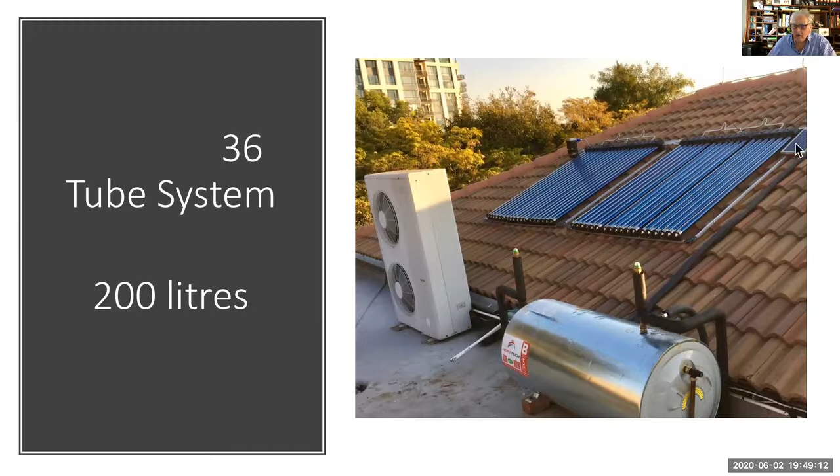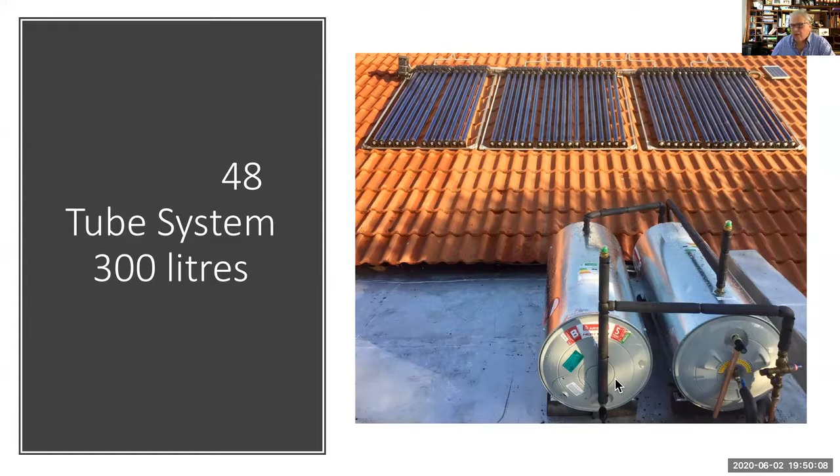So here's another example. This is actually a 48 tube system with a 300 liter system rather than 150 or 200. The tanks are joined together in series, exactly the same principle. The water is taken from the tank through the solar collectors and back again into the other tank, and they're joined together in series.

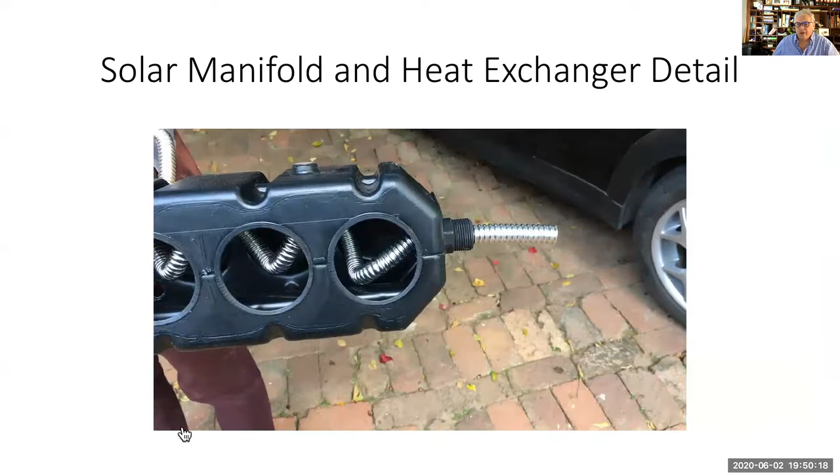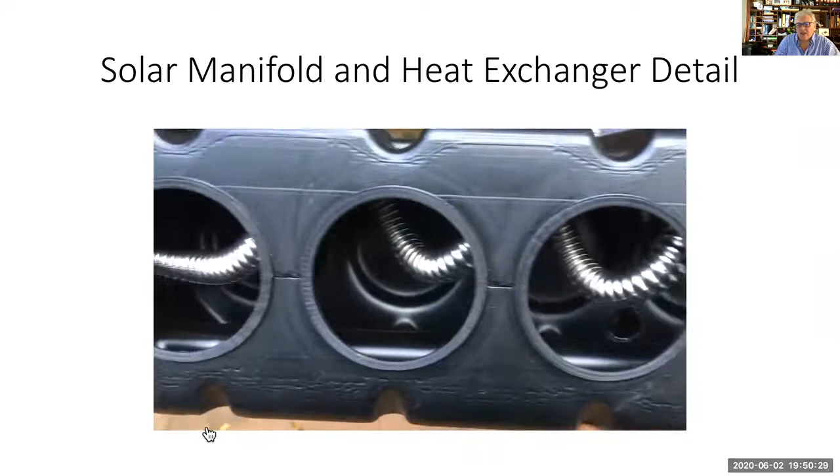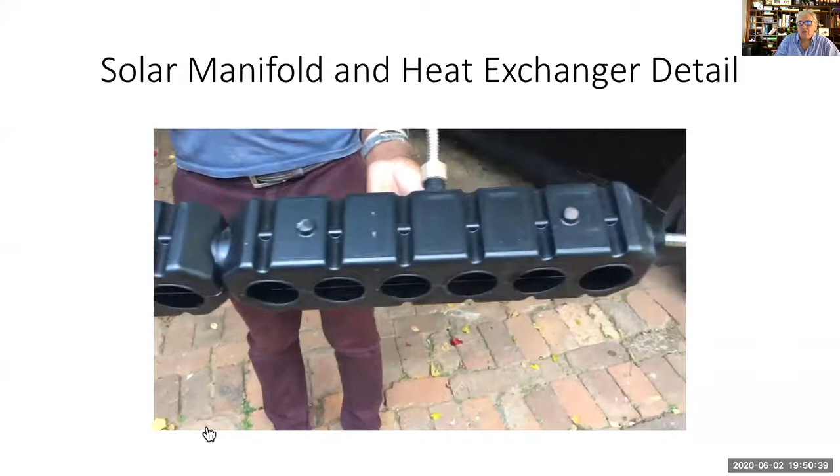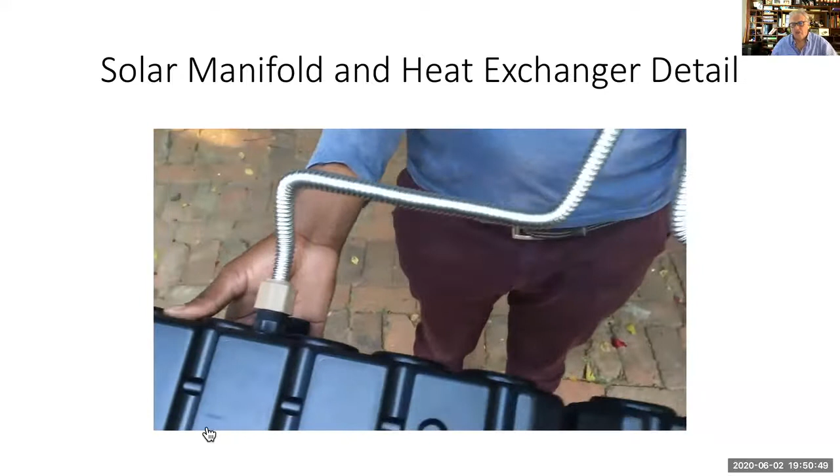So how does it work? The solar manifolds have a heat exchanger inside them. And in here, you will see that there is a corrugated stainless steel corkscrew, which is acting as the heat exchanger. And as we pull back and look at the manifold from slightly farther away, you'll see that there is another piece of corrugated at the back, which looks rather like a coat hanger, and I'll be explaining that a little bit more later on. But basically, that is the venting system, which is unique in this type of solar water heating system.

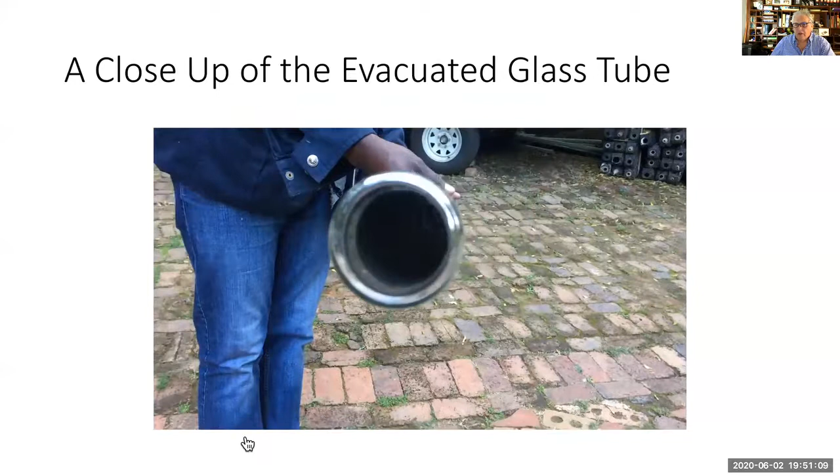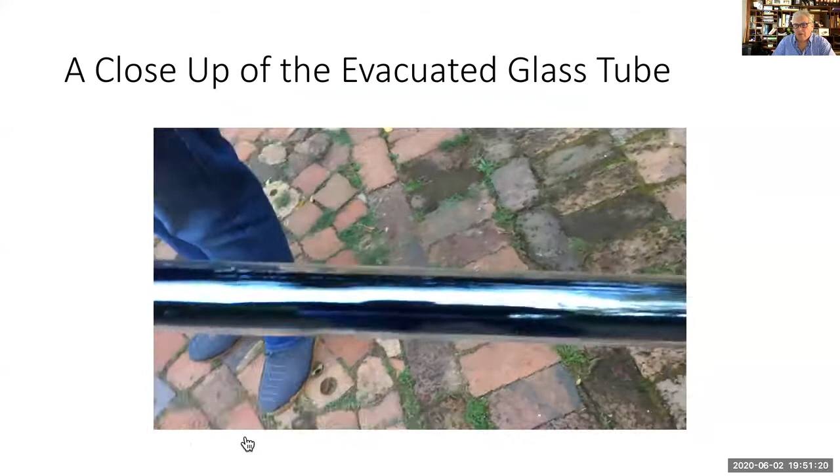So then we go back, and what we just looked at is the solar manifold and the heat exchanger. And we now look at the evacuated tubes which are going into it. The evacuated tube is around 1800 millimeters long, about 58 millimeters in diameter. It's two pieces of glass with a vacuum between them which reduces the heat loss. And they are filled with water in our case, and they are inserted into the manifold.

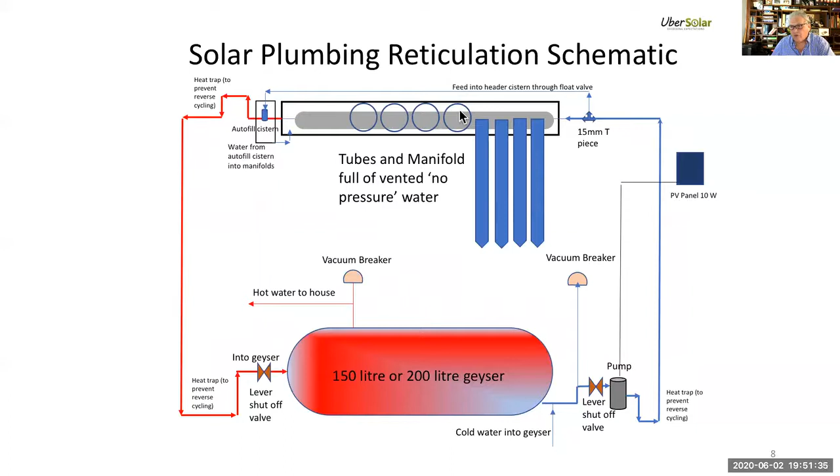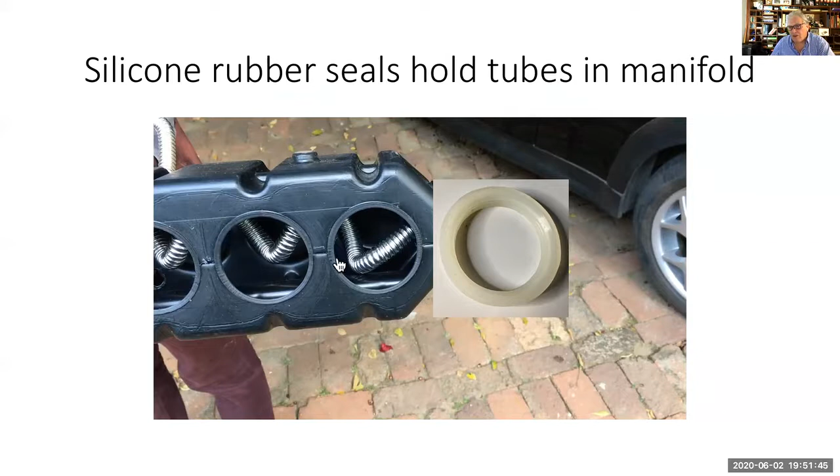So here we are with the manifold. Here are some examples of the tubes being shown. There are the holes which they are going into. And if you look at it again here, you can see it with a rubber silicone seal, which actually seals that and holds the tube in place.

So what is the performance of the tube? That's what we're really looking at. In our case, each tube will have an output of around 0.27 to 0.35 of a kilowatt hour per day. For example, with 30 tubes, that will be about 10.2 kilowatt hours. And the amount of electricity that is needed to heat 200 liters from cold at 16 Celsius to hot at 60 is 10.2 kilowatt hours. So it's the same as 30 tubes on the average South African day.

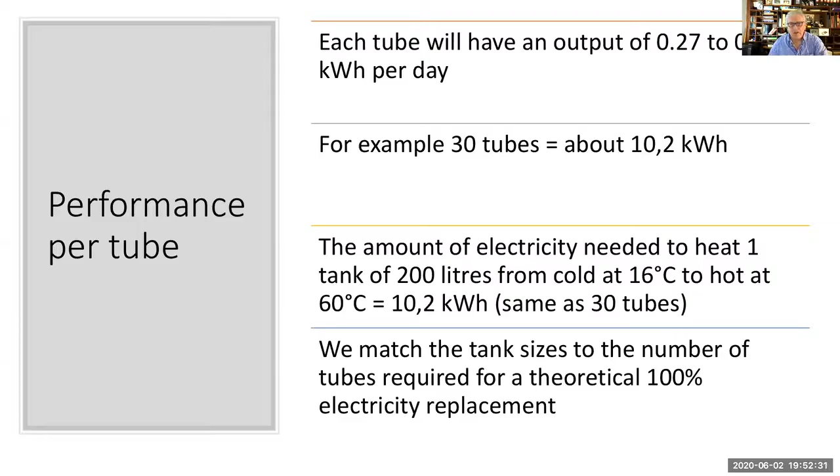And what we do is we match the tank sizes to the number of tubes for a theoretical 100% electricity replacement in all sizes. So we have an 18 tube system, which is either put on 100 or 150 liters for 1 to 2 people. We have a 24 tube, which gives about 7.5 kilowatts, which is ideal for 150 liters. Likewise, 30 tubes for 2 to 4 people, 36 tubes, 42 tubes, 48, and then we start getting bigger and bigger to 60, 96 tubes, etc. So what we've just shown you there is that essentially we're a plug-and-play solution.

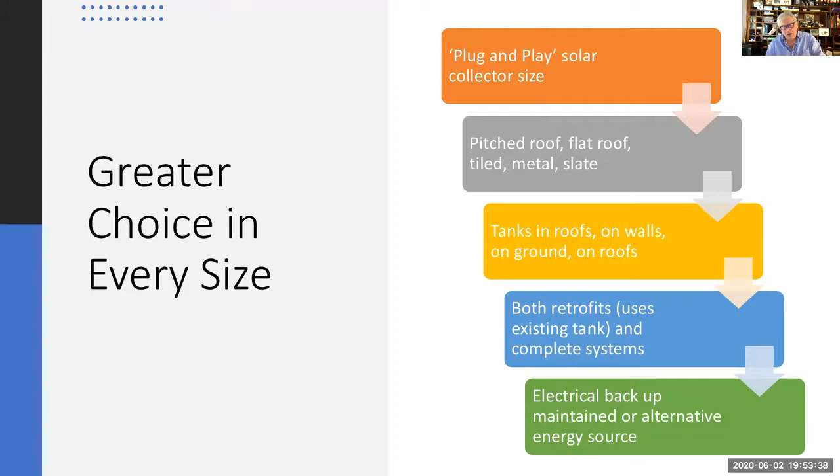The solar collector can be any size, and it can be on a pitched roof, flat roof, tiled, metal, slate. The tanks can be anywhere. They can be in the roofs, they can be on walls, they can be on the ground, they can be on flat roofs. We can do both retrofits, which are using your existing geyser, as well as complete systems where we provide another tank, and the electrical backup, which is necessary for guaranteeing hot water, or an alternative energy source is always going to be there.

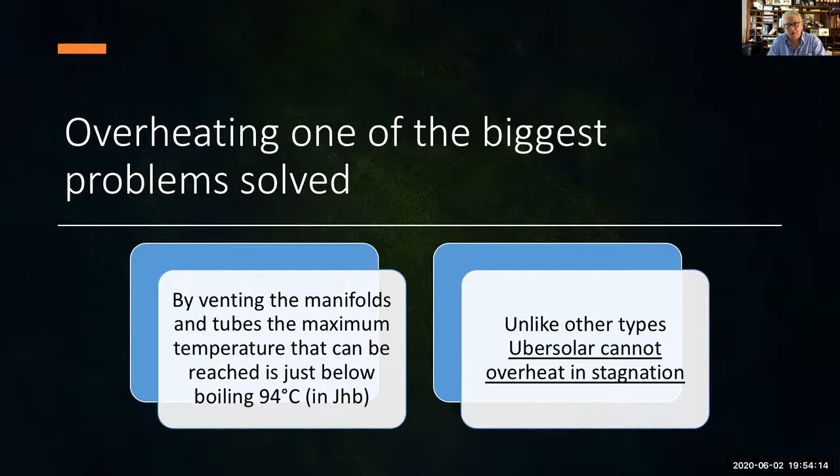Now, one of the biggest problems, and it's something nobody ever really talks about with solar water heating, is overheating. And overheating happens when one is in stagnation and no water is being used. We've overcome it by venting the manifolds and the tubes, and the maximum temperature that can be reached is just below boiling, 94 degrees Celsius in Johannesburg, slightly hotter in the Cape. And unlike other types of solar water heating systems, high pressure ones, we cannot overheat.

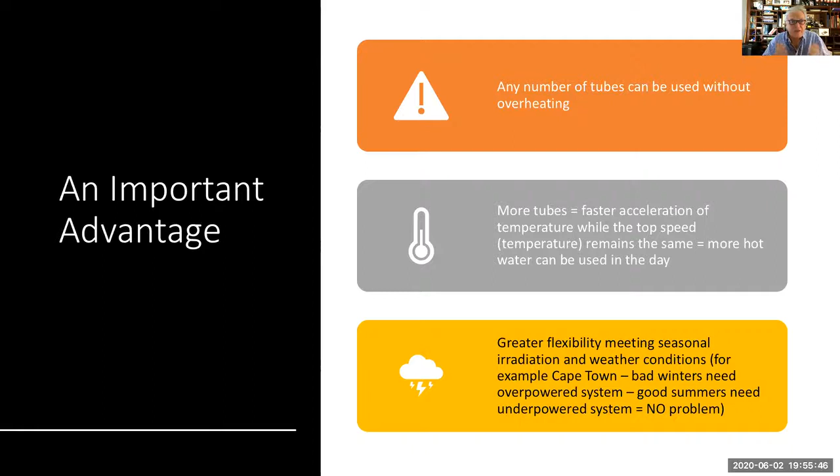And if you look at the whole thing, an evacuated tube has a couple of different heat transfer mediums. You can either have water, or you can have what's called a heat pipe riser, and we discussed that in another video. But when water is used, rather than the heat pipe riser, the cost of the tube, which is exactly the same tube in both cases, is about 60% cheaper. And the tube has very nearly the same output, whether it's a heat pipe riser or water. So therefore, we can actually put in more tubes, which means more power for less investment.

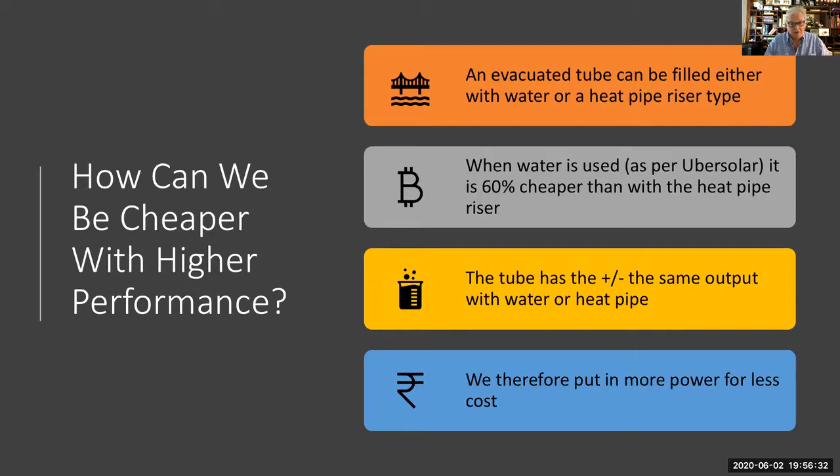So simplicity is the key to our systems. No other solar water heating system worldwide can match our performance for the investment cost. We can get more hot water from solar per rand invested. We can get more kilowatt hour savings. We get better outputs than gas or heat pumps. We achieve faster paybacks, higher returns on investment, greater safety, reliability, and longevity, and more flexibility.

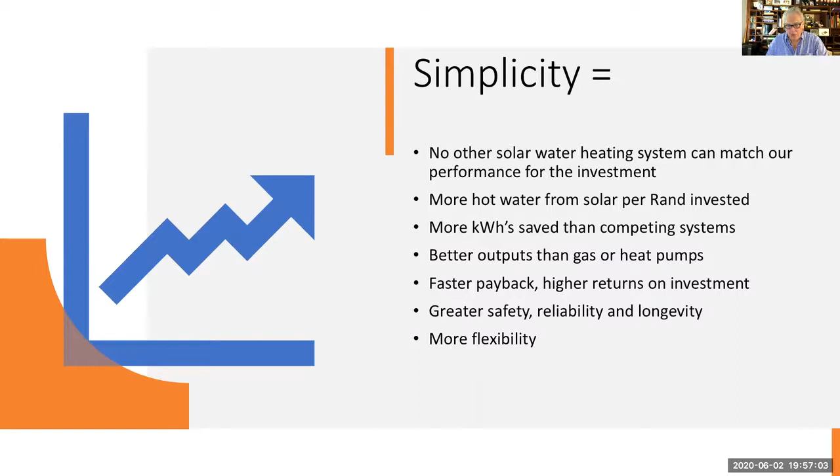But I hope, having got to this stage, you have an understanding why we believe we're better. And it's actually because we went backwards in technology. We've made it simpler. We've made it cheaper, using basically the same components as everybody else, but just with higher performance.